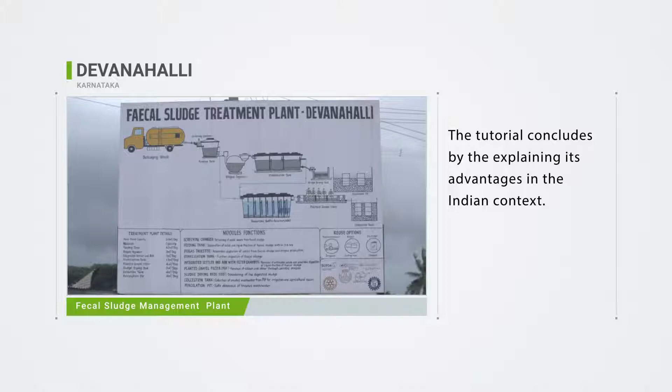Today, 4 out of every 10 urban households rely on septic tanks or other on-site sanitation systems. 70% of the sewage generated by urban India goes untreated. Cities lack data on the number and spatial distribution of such on-site systems. Cities are also not equipped to ensure that such on-site systems are desludged regularly and safely.

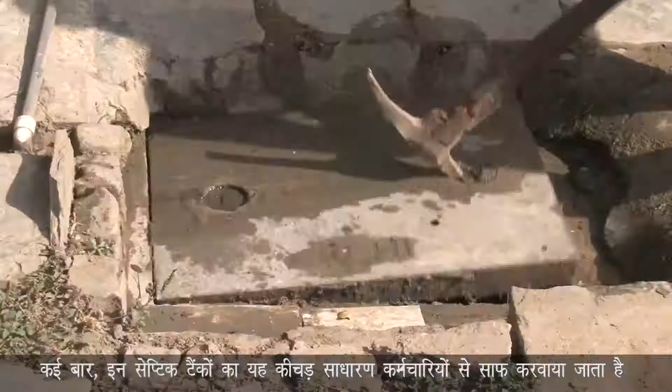Many a times, sludge from septic tanks is removed by informal workers without any safety gear. Typically, this sludge is then disposed of in water bodies and unoccupied lands without any treatment. This practice has even led to deaths of informal workers engaged in this practice. Management of fecal sludge continues to remain a major challenge for India.

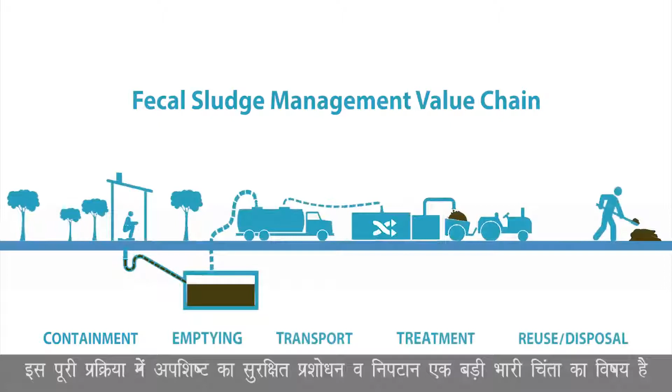Fecal sludge management refers to the containment, emptying, transport, treatment and reuse or disposal of fecal sludge from holding tanks. Of this entire value chain, safe treatment and disposal of sludge is a critical area of concern.

So in 2013 and 14, we were conducting a study to understand what were the issues with wastewater management, especially at decentralized scale. And one of the issues that came out very clearly was that we had lots of these small-scale systems around Bangalore and also in the towns of Karnataka, where people were not able to manage the sludge that was being generated. So BWSSB, the water agency in Bangalore, they have been allowing fecal sludge to be disposed in 2 of their sewage treatment plants, but there were lots of challenges related to that.

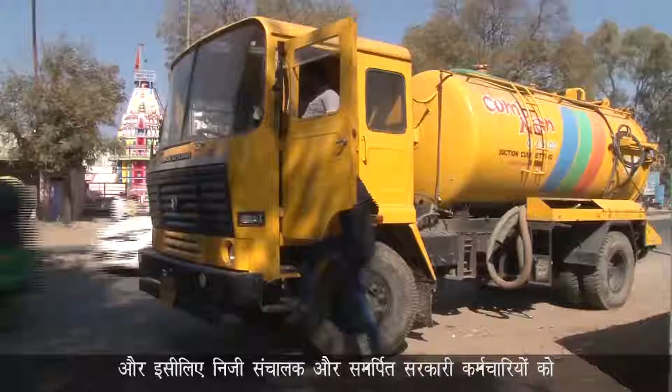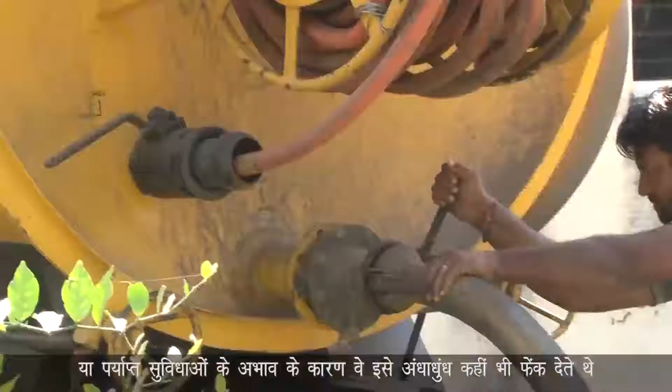And therefore, the private operators or the dedicated personnel from the government side, they were facing problems with disposal of fecal sludge. So they either had to travel too far distances or lack of facilities for them. So they were disposing it indiscriminately. And this was a major problem for the community in general, for the environment, and for these service providers.

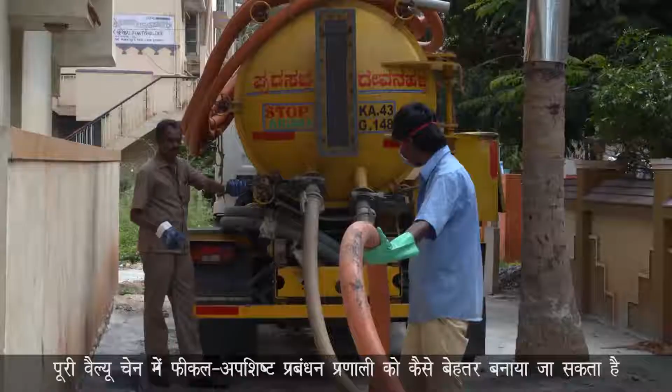Devanahalli, a small town located at the fringes of Bangalore, shows how the fecal sludge management system can be improved across the value chain, be it regular desludging of septic tanks through mechanical means, and safe treatment and reuse of the sludge as manure. A town municipal council with a population of about 35,000, Devanahalli has become the first town in the country to set up a fecal sludge treatment plant.

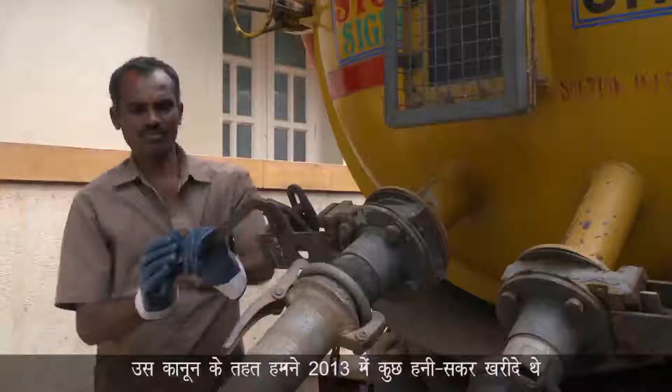We have 95% of on-site sanitation facility. Some of them are twin pits. Almost all of them are single pits. Government has passed the Prohibition of Employment of Manual Scavengers and their Rehabilitation Act in 2013. Under that act, we have purchased a honeysucker in 2013, and we are using it from 2013 only. Along with the TMC honeysucker, another 5 to 6 private operators are also operating in town.

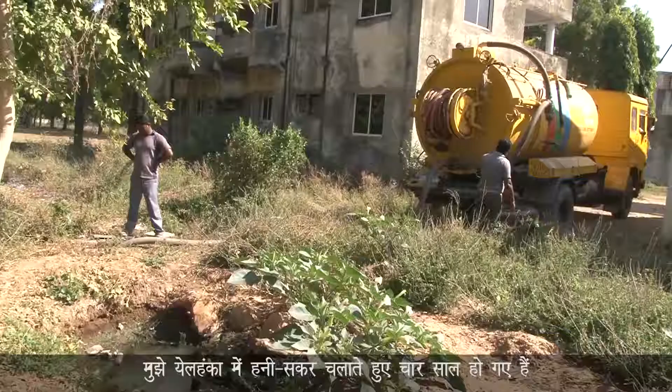My name is Narsimha Murthy. I am from Yelahanka. I have been doing desludging in this area since the last 4 years. For the last 4 years, I have driven a honeysucker around Yelahanka. Earlier, whenever we did desludging around Yelahanka, we dumped it in the grain fields or the grasslands nearby. After this plant opened, we have been coming to Devanahalli. Whenever we desludge in Devanahalli, we leave it at the plant here.

So CDD has approached us, and the project was funded by Bill and Melinda Gates Foundation. So CDD had the funding, and they wanted a ULB to implement the project, and they have approached us, and we discussed it with our council body, and they have accepted to give the land, and after that to maintain the plant also. So we took permission from our district commissioner, and we identified a suitable land, and we have given the land to CDD for implementation of the plant.

So we have been a technology partner and a facilitator to help with the management plans around the treatment facility itself. Then with the truck operations, what would be the best way to handle the trucks, and also with the entire management of the fecal sludge at a town level.

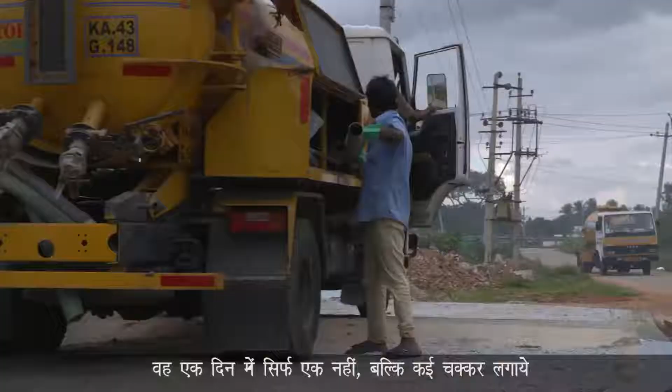So right from how can we improve the desludging calls that people have to make to the municipality to say, yes, my septic tank is full, please come and empty it. So how to facilitate that process, then to the truck operations of how to bring trucks, make them run smoothly, have multiple trips in a day, not just one trip in a day. Also to improve the health and safety requirements of these operators who are running the system, setting up standard procedures for the government so that they can follow these procedures.

Also how to record data at the municipality level so that all the houses are marked on a map in this town, and people know exactly when these houses need the tanks, septic tanks or pits to be desludged. So there's an entire desludging mechanism that will be put in place with the help of IT support systems so that it can function smoothly, and also training people at the municipality level, creating awareness in the communities in the

town. This was a joint effort of the Directorate of Municipal Administration of Karnataka, the Devanahalli Municipal Council and Consortium for DEWATS Dissemination, or CDD. The project consisted of 4 main components. 1. Procurement of honeysucker to be operated by the Municipal Council. 2. Building of a 6,000 litres per day capacity fecal sludge treatment plant.

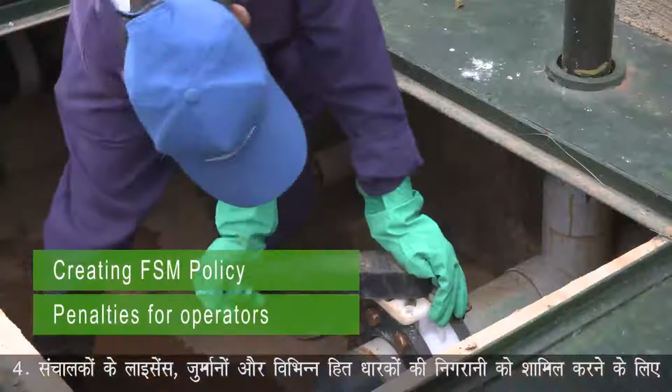3. Designing an integrated contract for operations and maintenance of trucks and the FSTP. 4. Creating an FSM policy to include licensing of operators, penalties, and monitoring of various stakeholders. The fecal sludge treatment plant doesn't require any electricity or mechanical equipment.

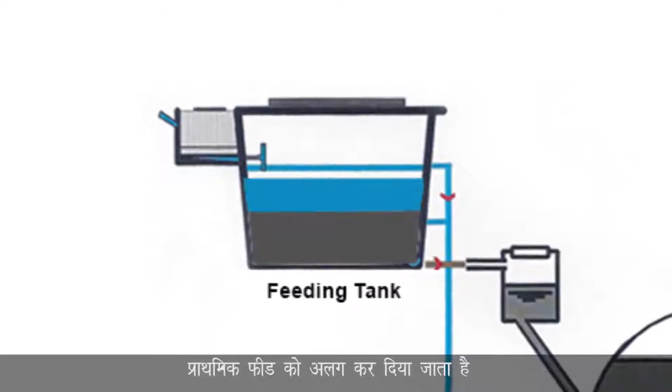Since all the process is gravity based, the fecal sludge treatment plant at Devanahalli is designed based on 4 principles of wastewater treatment. One is solid-liquid separation, one is anaerobic digestion, and the others being dewatering and pathogen removal. Once the sludge is fed into the feeding tank, the solid-liquid separation takes place in it. The initial feed is separated. The supernatant is treated in the liquid treatment system, and the solid is treated separately.

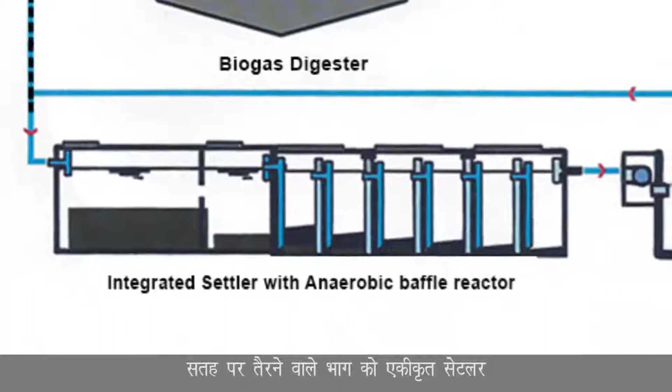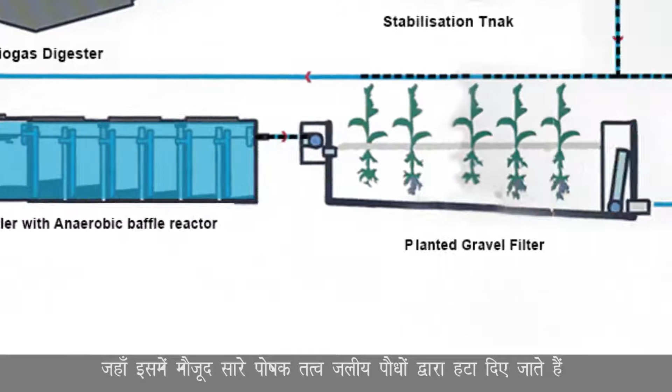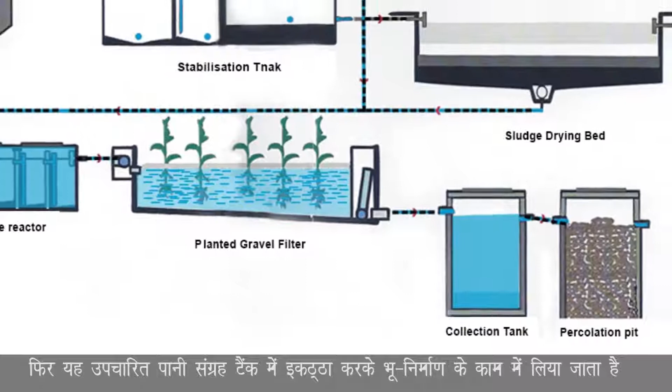The supernatant is treated with an integrated settler and anaerobic baffle reactor (ABR) with filter chambers. Most of the suspended solids are removed in this. The wastewater then flows to the planted gravel filters, where most of the nutrients are removed by the rooted aquatic plants. The main purpose of the planted gravel filter is to remove the odor and color of wastewater. Then the treated wastewater is collected in the collection tank and used for landscaping.

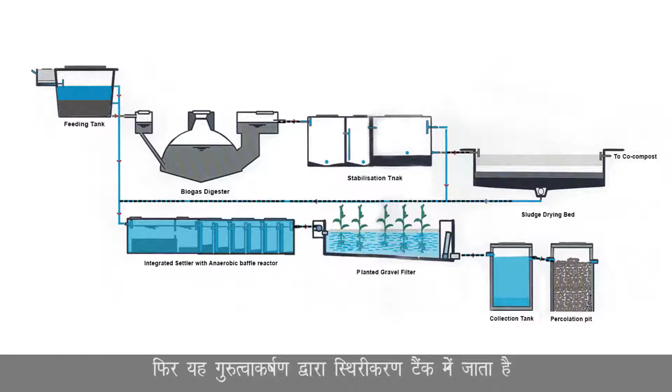Solids are digested anaerobically in the biogas digester. Solids then move by gravity to the stabilization tank, while the biogas recovered in the biogas digester is used by the plant operator for his cooking needs. The solid from stabilization tanks is then sent to the drying beds, where it is dried for 15 to 20 days. Here, dry sludge is exposed to UV light for pathogen removal.

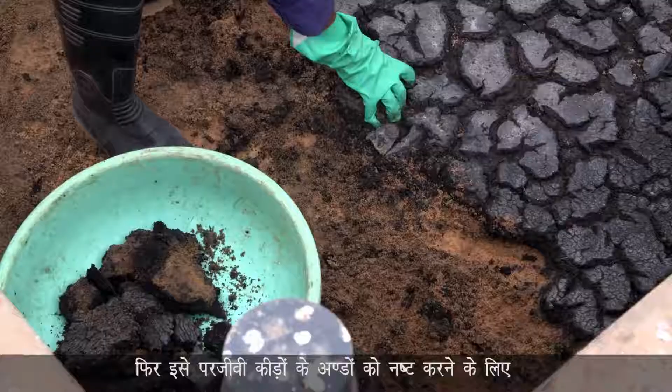This dried sludge is then co-composted with the wet waste provided regularly by the city to remove helminth eggs. Dried sludge is mixed with the wet waste in the ratio of 1:3. The whole process of co-composting takes around 20 days. Till date, the plant has received about 5.3 lakh liters or 272 truckloads of fecal sludge. The output of the plant is treated water, which can be used for landscaping. The sludge obtained can be used as a soil enricher.

To get regular feed for the FSTP and streamline processes, the Municipal Council conducted an awareness workshop with the private operators and citizens. Finally, the sludge should be used as soil conditioners and manure, because in 2/3 of semi-arid India, our fields lack organic carbon and farming is in a crisis. The sludge provides an opportunity to improve the soil conditions and improve the livelihoods of small and marginal farmers.

My name is TV Rajendra. I am a resident of Devanahalli and I am a farmer here. I get dried sludge from the fecal sludge treatment plant and I use it to grow mangoes, grapes, capsicums and flowers. I don't use it directly. I mix it with the new soil and then I use this sludge. The results are very good and you can see the effect on my produce.

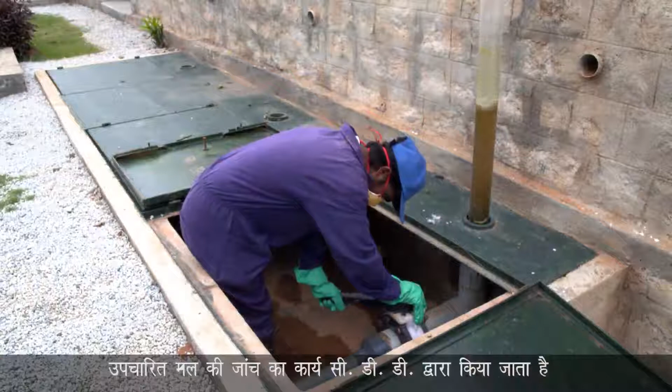The testing of the treated sludge is being carried out by CDD. The dry sludge obtained from treated sludge is being sold to farmers of nearby villages at 50 paisa to ₹1 per kg. So one of the ways which is being tried in Devanahalli is to see if the fees required for desludging and for running this truck business in a financially viable manner can be included in the property tax itself.

So the amount for every household will be based on the land area that they have or the property size. People already have specific slabs for property taxes, and in that slab an additional amount would be added, which would cater to regular desludging at an interval of at least 3 years, and would take care of the amount that has to go into running this truck in a financially viable manner.

To make fecal sludge management better, we are planning to give building licenses only after thoroughly inspecting the septic tank design they are constructing. Sludge is handled well, biogas is recovered from it, and then it is treated so that there are no pathogens left, and even the water is recovered from the sludge and the solids are recovered as manure and are sold. So it's a formal structured approach to managing fecal sludge.

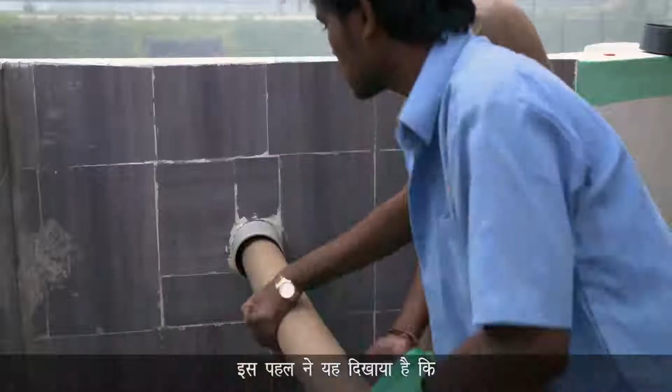With the huge challenge of managing fecal sludge in the country, this initiative shows how on-site sanitation can be safely managed in a small town and is a beginning of safe fecal sludge management in India.